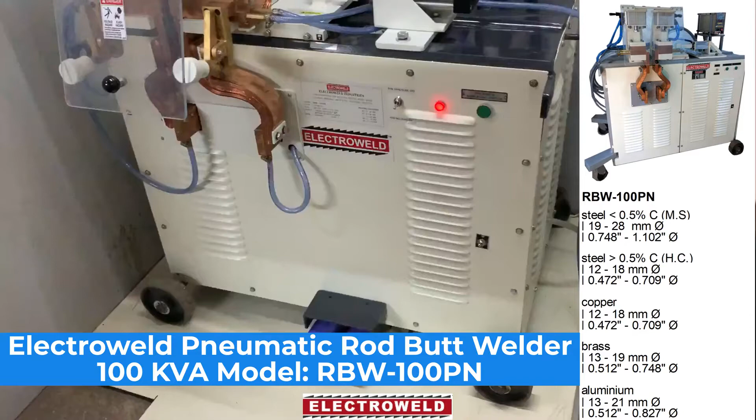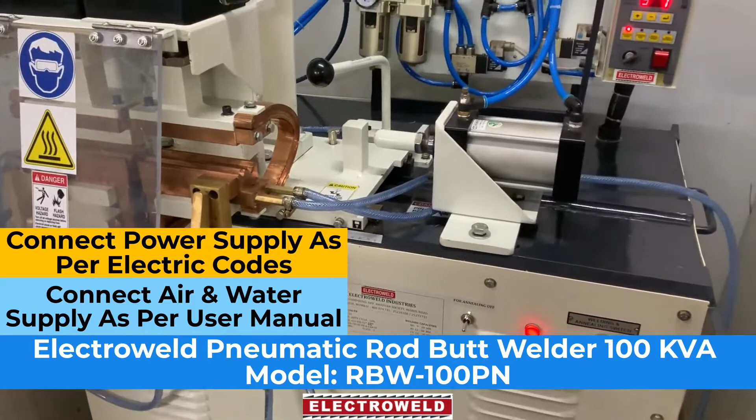This machine can weld various kinds of rods. Connect this machine after reading the nameplate and the manual to the main supply. Connect air and water, with the inlet and outlet of the pump placed in a 200 liter water tank.

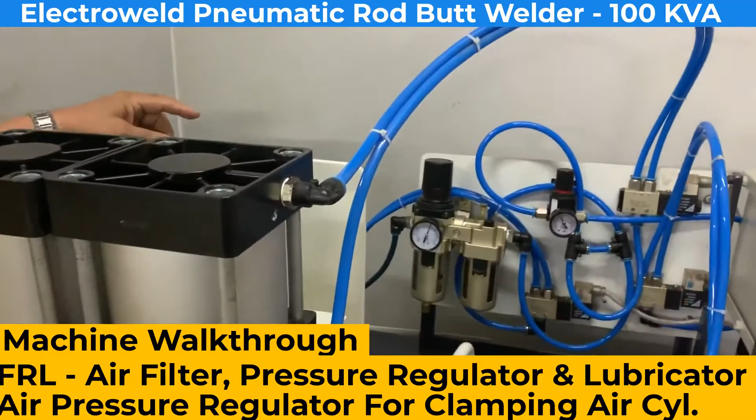Now we'll show you the parts. This over here is the air inlet, this is a pressure adjuster for clamping the rods, this is a pressure gauge, air filter, drain knob, air lubricator, then we have the air regulator for welding pressure, then we have solenoid valves for clamping and welding.

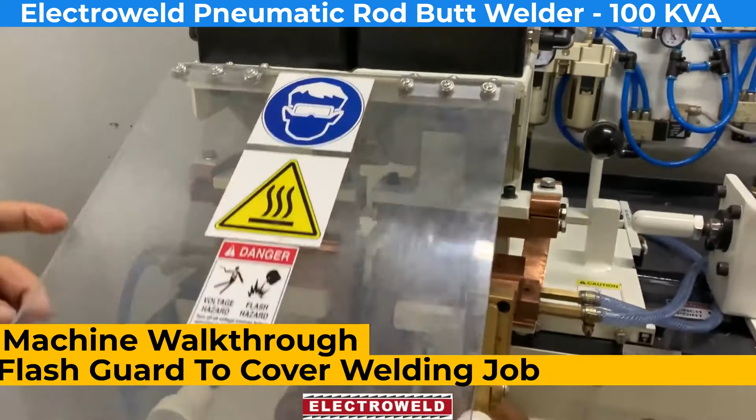Here we have pneumatic cylinders for clamping the rods. This one here is a flash guard. These are clamping jaws, made of chromium zirconium copper, hardened and tempered alloy welding jaws with different grooves for different diameters. And this one here is the annealing jaws.

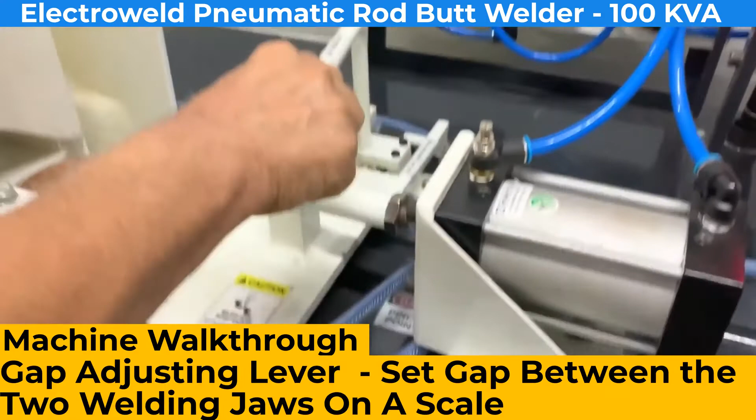Here we have the welding pressure cylinder. This is a flow control valve for adjusting the speed of the cylinder. Here we have a gap adjusting lever between the two jaws, which can be set at the gap scale over here.

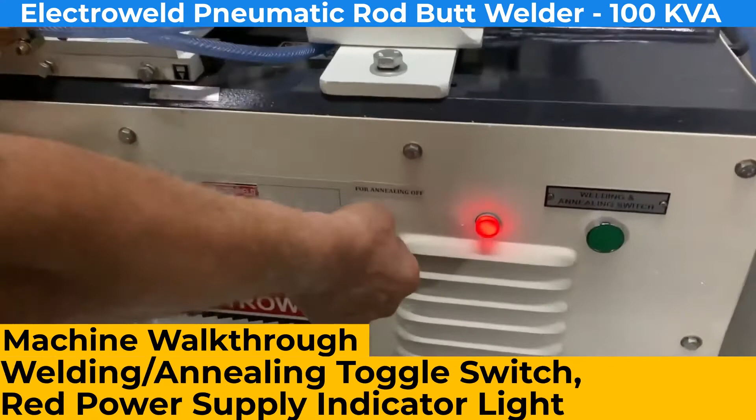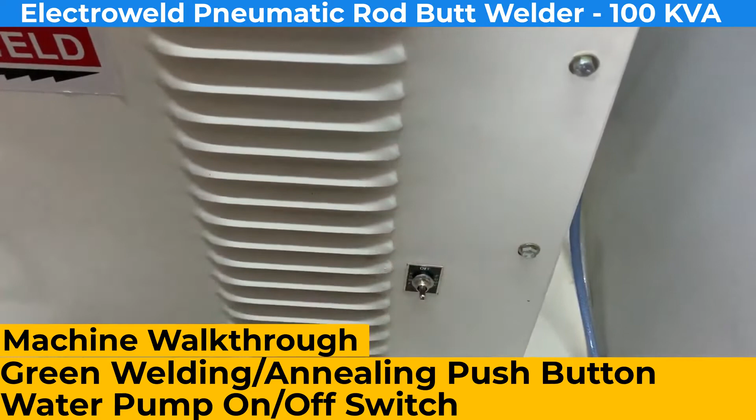Then we have the welding and annealing switch. This is the main supply indicator. This one here is the welding and annealing push button. This one here is the pump on-off switch. These are the two clamping foot switches for the rods.

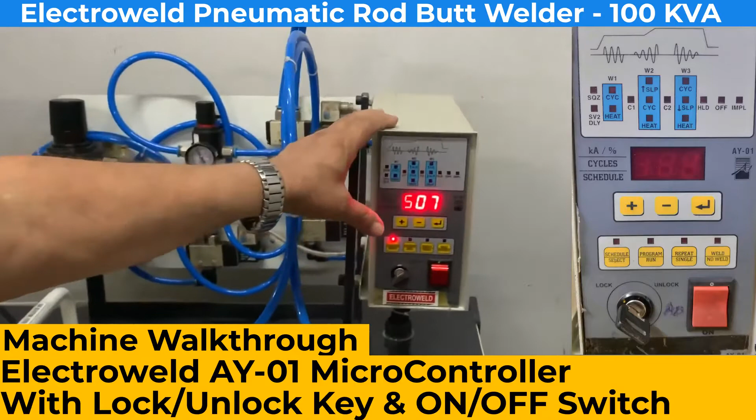Here we have a microcontroller with lock and key. This is the on-off switch. In this you can feed various welding parameters.

At the moment we have fed approximate welding data parameters in different schedules. For example, when you press this schedule switch, you will find schedule numbers. You can bring it down to 1.

Now you can switch off this push button, go to the program button, and you'll find the program selection over here. Here we have set squeeze time as 90 cycles. You can decrease or increase as required. Then enter.

Till you come to W2, here we have set 30 cycles as the weld time. That also can be increased or decreased as required.

Then next is the heat percentage, that's the current that has to flow for welding the rods. This also can be increased or decreased. At the moment this is kept for half-inch dia MS rods. Then again, enter.

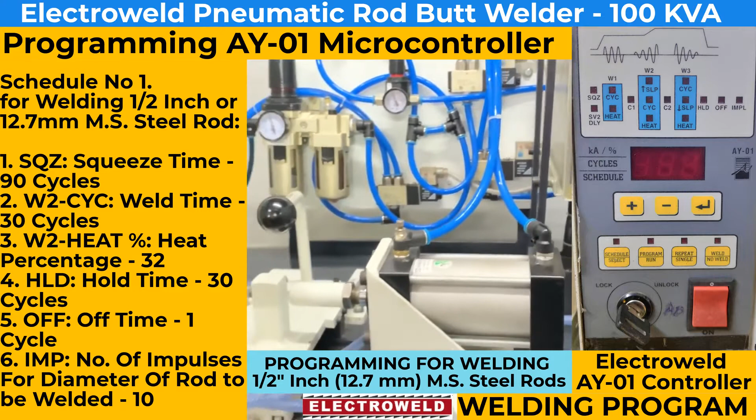With this key you can lock the program and take out the key so that nobody can change the program. Whenever you want to change the program, put the key here, unlock it, then you can change the program.

This is the on-off switch. This over here is a single repeat switch, that is used for spot welding. This here is a weld no-weld switch.

Now for annealing, we can go to schedule number 2. Put it off. Now for annealing 5/8-inch dia rods, we have put the annealing parameters. Squeeze time we kept as 0,1, then enter. Annealing time we kept as 25 cycles, which can be increased or decreased as required.

Then heat percentage we kept as 28%, which can be increased or decreased as required. Then here is the cool time, we kept about 4 cycles. Enter.

This is the hold time, 1 cycle, half cycle, 1 cycle. Impulse is 30 for annealing for a longer period, so that the rods are annealed properly.

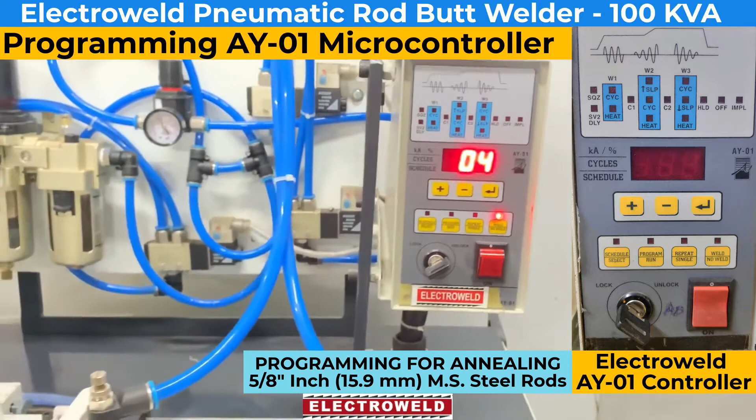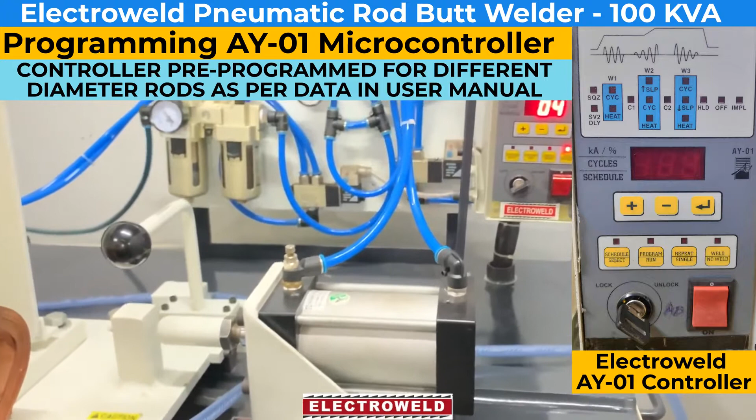Similarly, we have memorized settings for different dia rods in different schedules, which you can refer to in the manual and operate the machine control accordingly. Now we can bring it down to schedule number 1 for welding half-inch dia rods. If you recheck, you will see what parameters you set. They can be recalled.

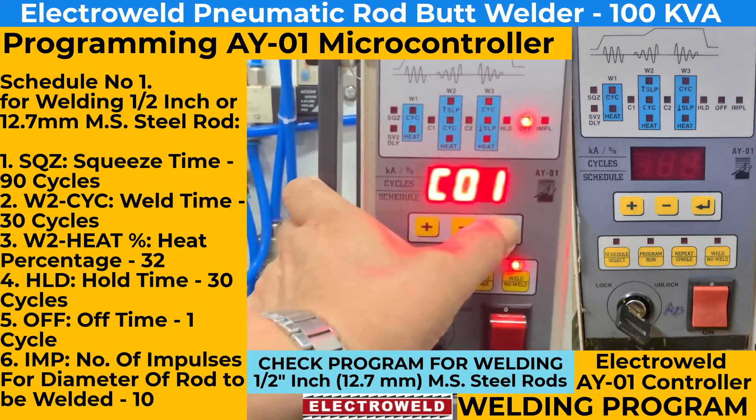This is how the program is set for different diameter rods. Now we'll try to weld half-inch diameter rods.

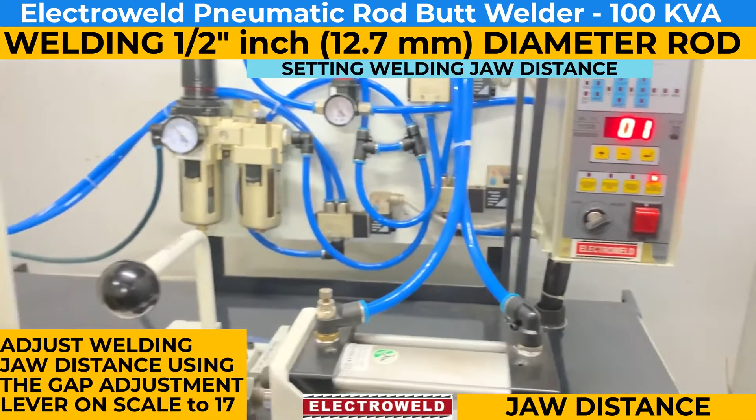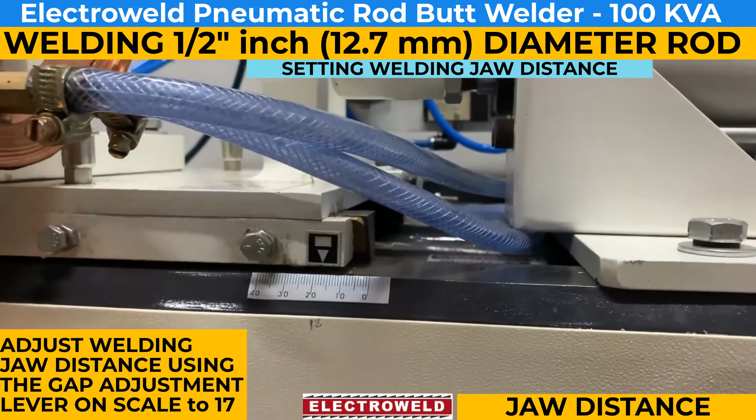For this, we have to adjust the gap. See, about 15, 16, 17. These parameters you can also read in the manual and then set the parameters accordingly.

Here for half-inch rods, we are keeping the clamping pressure about 95 psi. This over here is the welding pressure. We are adjusted at about 70 psi.

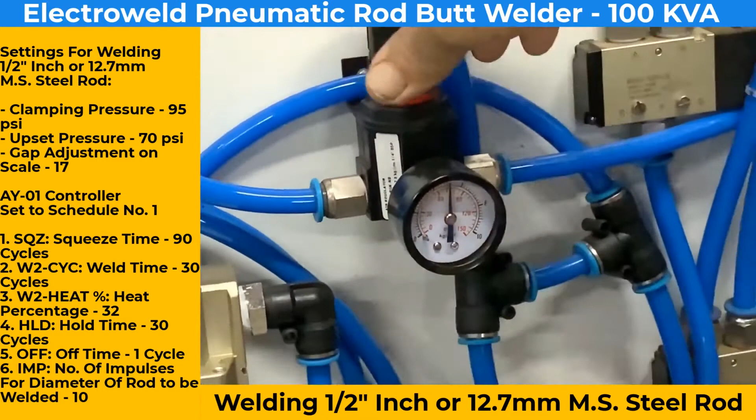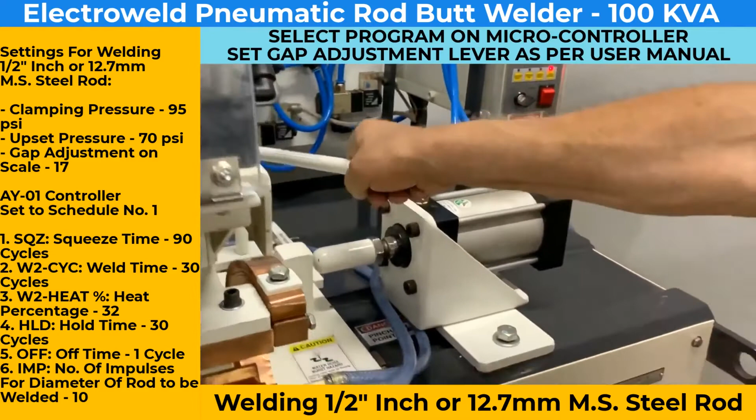Then, after adjusting the parameters in the microcontroller and adjusting the gap, switching on the pump, we can clamp the rods in the welding jaws like this.

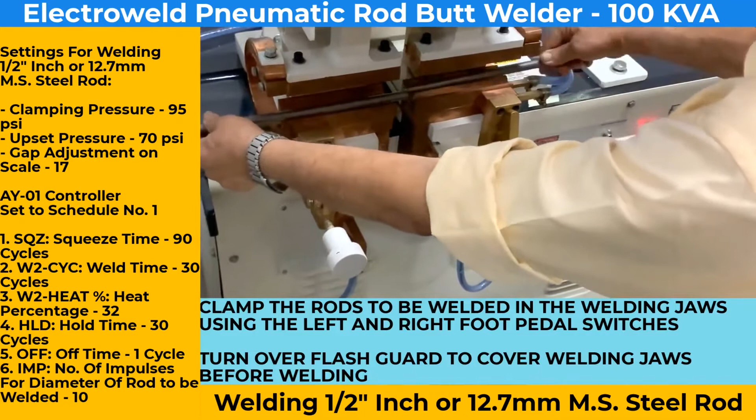Before that, put the flash guard. Now we'll press the push button. You will observe that when it's pressed, it is automatic. Now you can take this flash guard back, declamp.

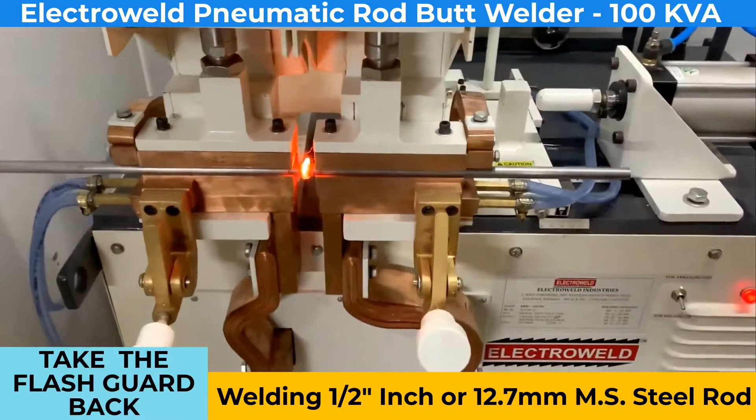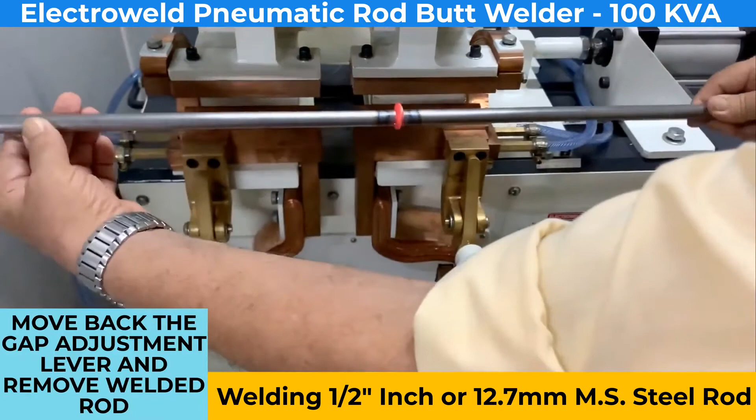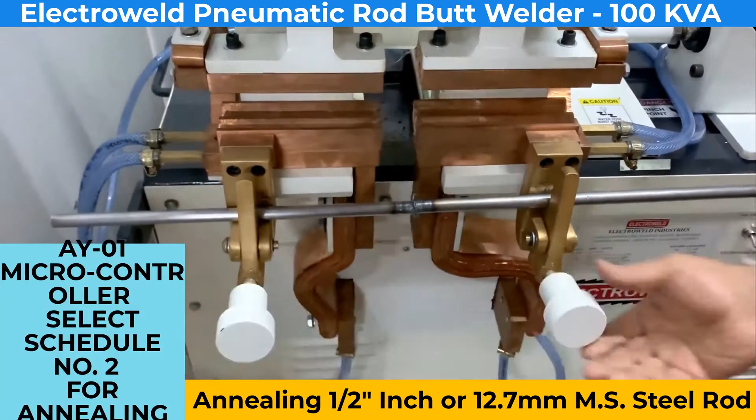See that the welded portion is in the center of the annealing jaws. Tighten fully. Now go to schedule number 2 for annealing.

Parameter set in this will do the annealing. Put this switch towards annealing. Then press this button. You will see annealing taking place.

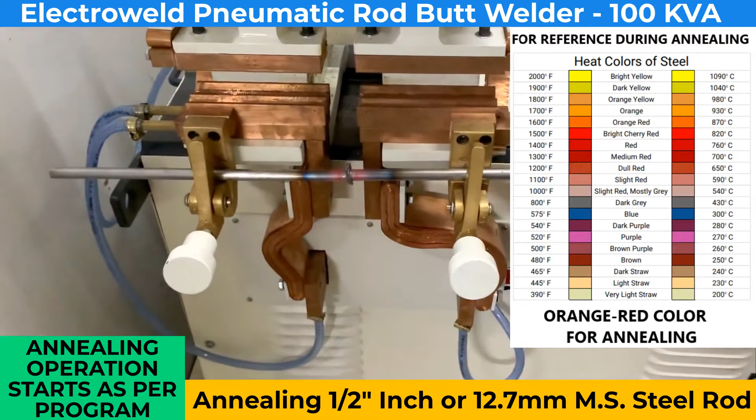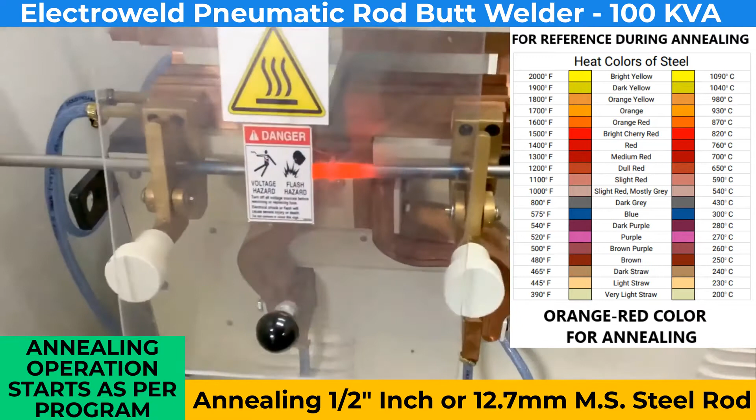Now this is annealed. For welding 5 dia MS rods.

Now we can change the schedule number from 2 to 3.

These parameters that we are setting may be approximate. You can vary them as per your requirement after proper trial to find out the better results.

Now we'll take this switch towards welding side, adjust the gap as per the parameter given in the manual.

Then again clamp the rods after cleaning properly the ends of any dust, dirt or any rust. Put in the center of the welding jaws, clamp them.

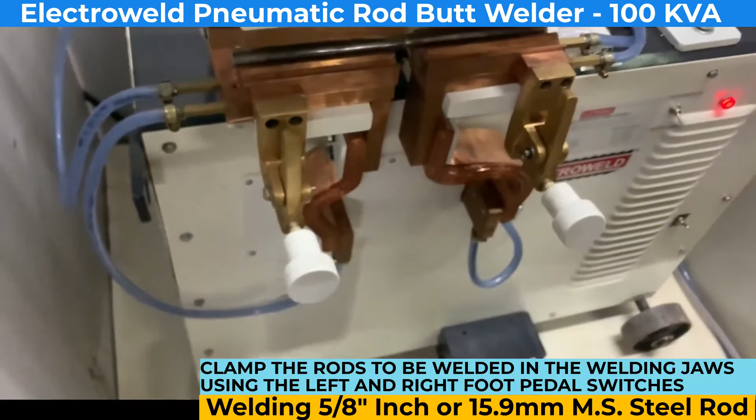See welding taking place. Now take the flash rod back, declamp.

Look at the annealing jaws. See that the welded portion is in the middle of the jaws. Tighten fully.

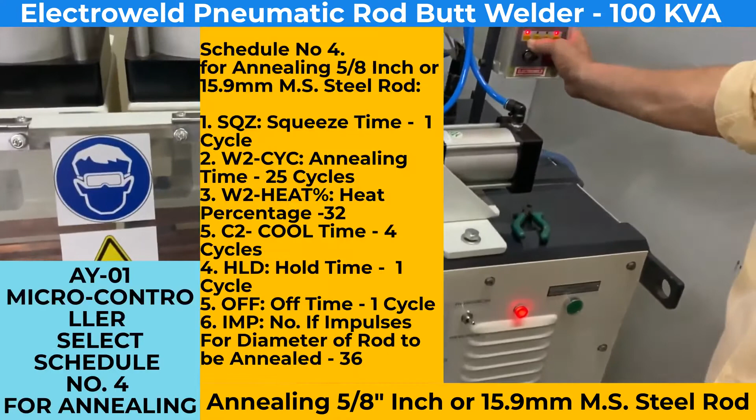Take the switch to annealing side. Now we'll change the schedule from 3 to 4 for annealing. Then you can press the push button for annealing.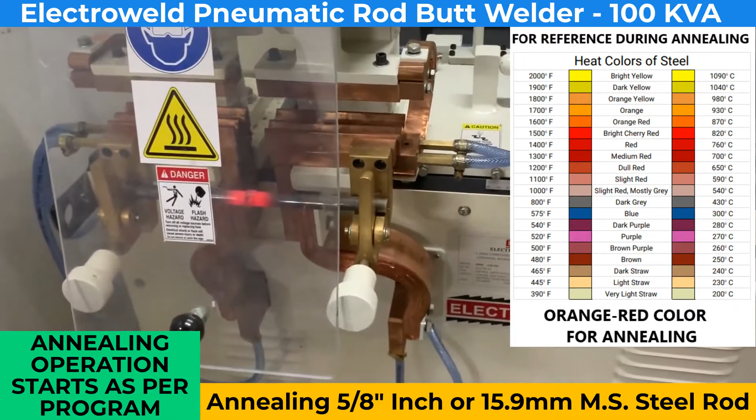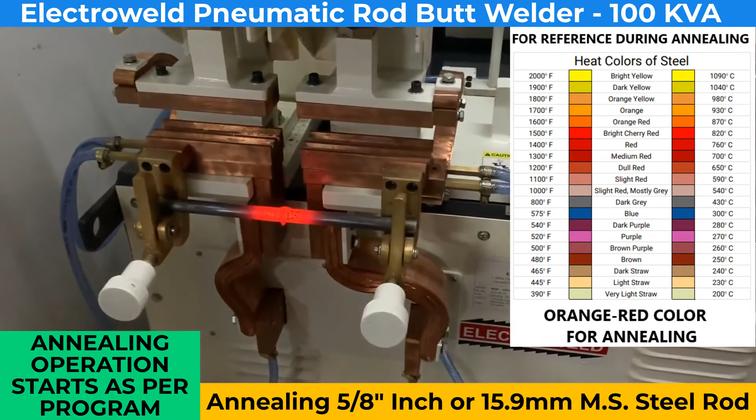See, this is how it's annealed. And then take out the welded rod, deburr the joint, and use it.

Squeeze is 90, weld time 30 cycles, heat percent is 40, hold is 30, off 1, impulse is 10. These are approximate data. You can vary them as per your requirements to get the proper weld.

Now we will adjust the gap as per the data given in the manual. Then put this switch towards welding side.

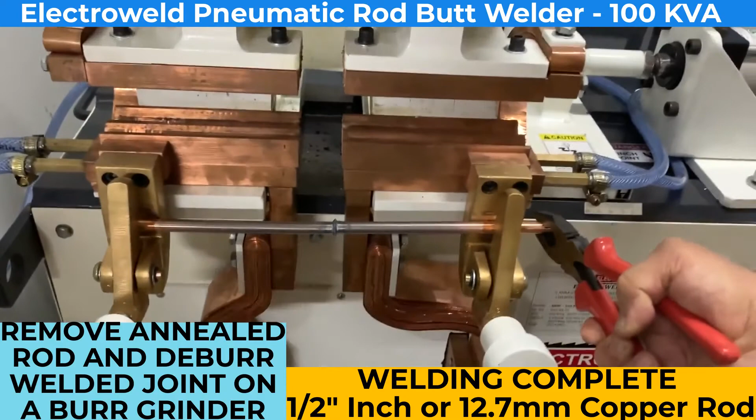Take this switch to the annealing and then take up the welding point. See, this is how the weld is done - you can take out the welded rod. Deburr the rod and then you can use it.

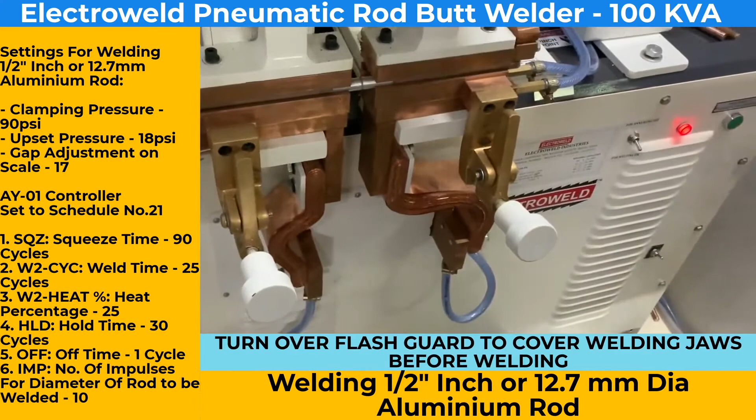Now we'll show you the welding of the aluminium rods. Now we can put for welding.

Take this switch for welding. Then the schedule 21. You can adjust the parameters.

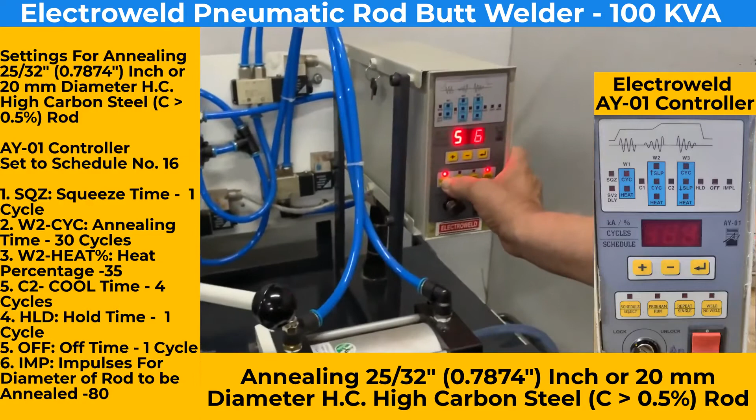Now you switch this switch towards annealing side. Go to schedule number 16 where we have set the parameters for annealing. Then you can press this button for annealing.

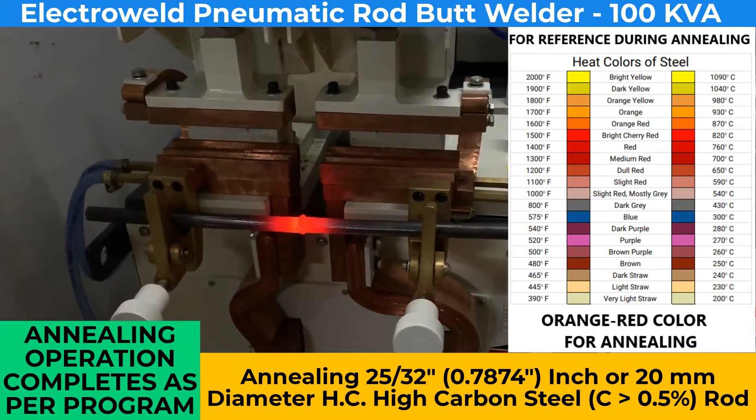They should have become red hot and the scales should appear on both sides of the welded joint. That means the weld is perfect. The heat must flow from the center to the outer surface.

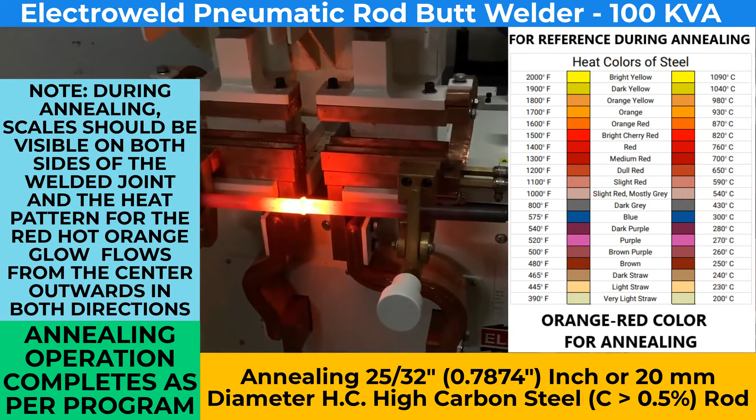See, the annealing is done. You can see the scales appearing on both sides of the joint. It shows the weld is good.

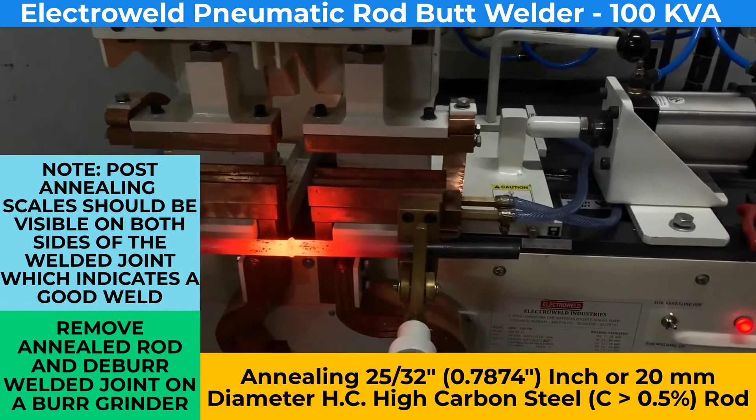Now you can take out the welded rod, deburr the weld burr and use it.

You have 25 schedules. You can memorize different schedules and programs for different diameter rods, and the meters will show you. There are 25 schedules available, so you can memorize the welding data as well as the programs by entering this data, and then use them as and when you want for different diameter rods.

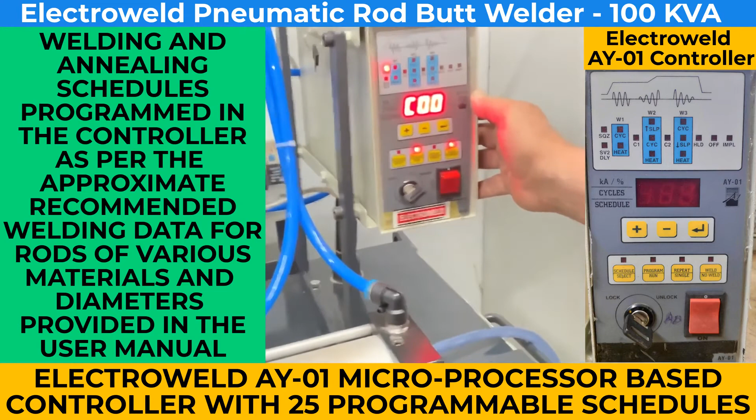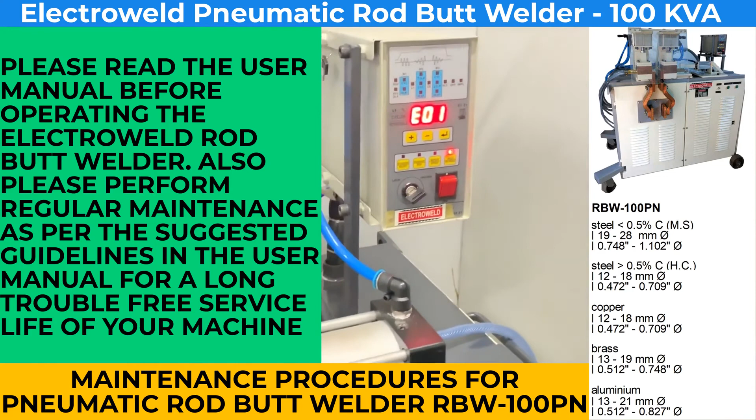This machine requires maintenance that is mentioned in the manual, which you must carry out for the better performance of the machine. We have also provided in the manual do's and don'ts. Please read the manual properly, then use the machine.

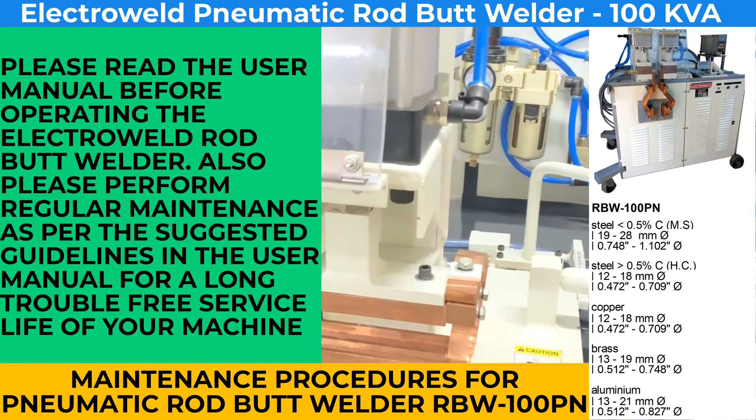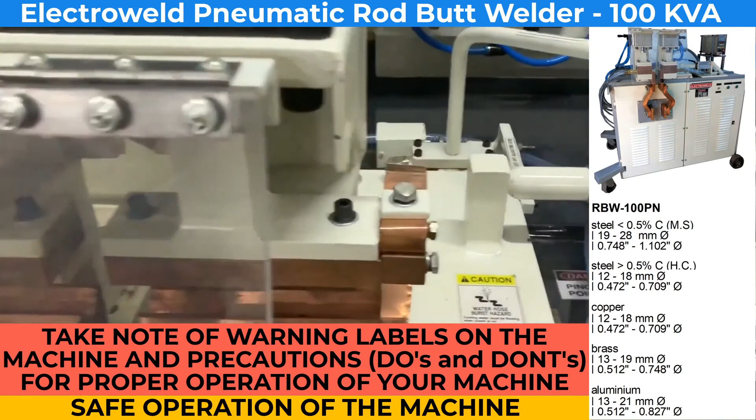Also see the stickers or precautions that we have put on the machine in a number of places for the safety of the operator.